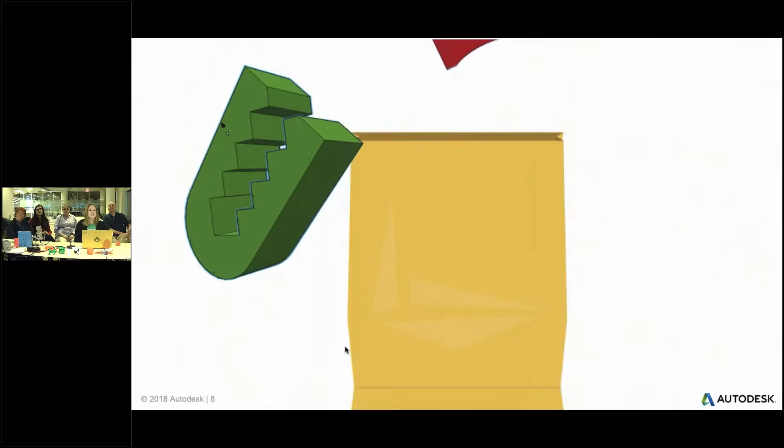All right, moving on. You might be here because you're a teacher interested in the topic of accessibility, or you might just be a geeky teacher like myself, interested in learning something new, and maybe you don't have any background in Tinkercad whatsoever.

So I just wanted to show you this quick clip that I think demonstrates pretty clearly what you can do with Tinkercad. Basically with Tinkercad, if you have an idea in your mind, you can bring it to reality in minutes, just like this.

When you open up Tinkercad, it's a free web-based tool, and a lot of the commands and functions you see happening here are very similar to like if you were to change the size of a picture, for example, in a PowerPoint presentation.

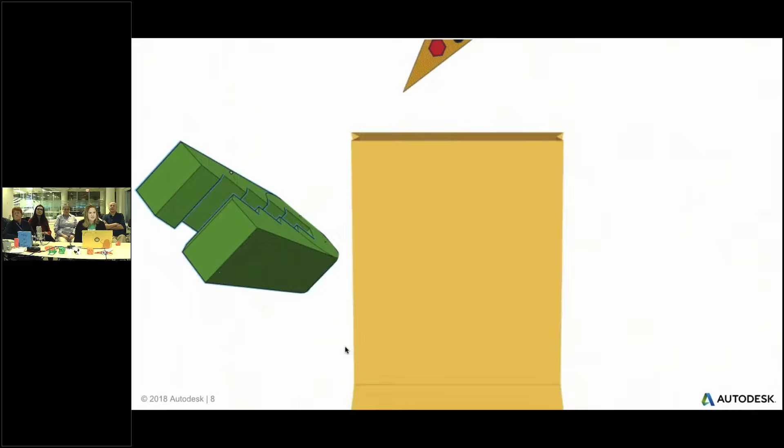It's really that simple. You're just dragging simple shapes onto a work plane and then making them more complex. Taking a cube and then adding a cylinder, and maybe getting super fancy and turning your shapes into holes to subtract from them and make them more intricate.

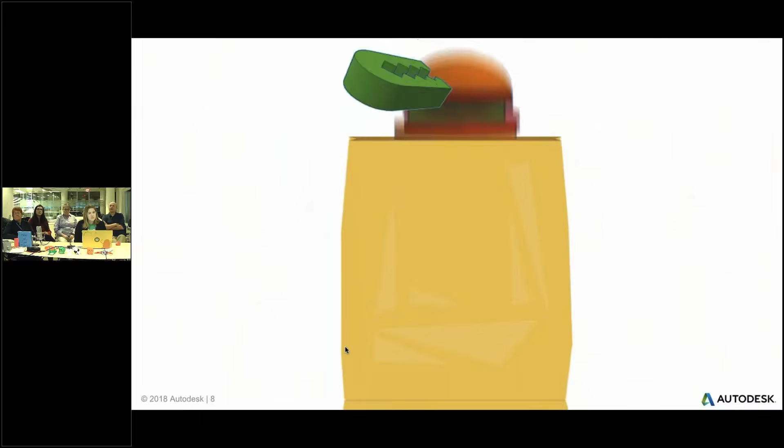And then once you're done, you can export your design as an STL file and send it to the 3D printer to print. So that's how simple Tinkercad is, and you'll see more examples of that later on.

What are we going to learn today? We're going to learn a lot of things today, and I'm really excited about it.

First off, we're going to be talking about the relationship between universal design for learning, universal design, which was actually the precursor to universal design for learning, and assistive technology. We're also going to learn about design thinking and its application to designs by, with, and for students with disabilities.

If you're someone coming from the education community, you're probably very familiar with inhabiting the land of acronyms. We use a lot of acronyms in education because we talk about a lot of complex, wordy things and we like to shorten it down.

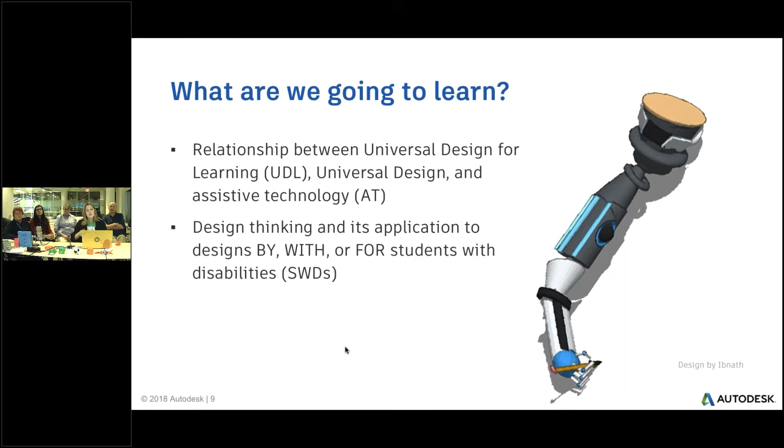But the one thing that I really like about the acronym SWDs is that it really makes you think about how, when you're talking about students with disabilities or people with disabilities or athletes with disabilities, you put the WD last because you speak about the person first. So that's just a nice thing that I've learned through this process.

Another thing that we're going to learn is ways to increase participation of students with disabilities in STEAM activities that are purposeful and promote access and student agency.

One of the really important things that you might learn today, in the spirit of universal design for learning, is that although in some cases we're going to be talking about teaching students with disabilities, when you embed universal design for learning into your teaching, it actually helps everyone. So that's something we also hope that you take away.

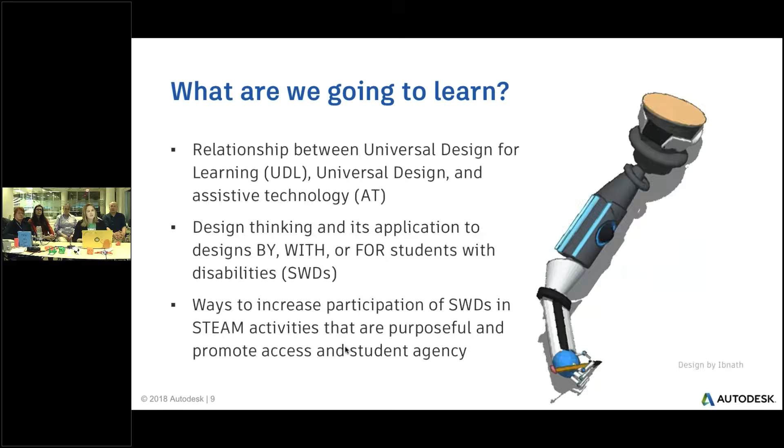In addition, we're going to hear user stories of creating universal design for learning and assistive technology tools using Tinkercad and other 3D design programs.

When I hear the word assistive technology, I think of something futuristic and robotic and very advanced, but an assistive technology could be something like maybe someone in your family has limited mobility in their hands and they're having trouble using an iPhone, and then you just make a simple adaptation to it in order to make the use of that object more easy for that person. So assistive technologies are quite commonplace as well.

Glasses, for example, eyeglasses used to be considered a medical device, and then designers got their hands on them in the 50s and 60s, and they became more of a fashion object.

The keyboards that we use, like typewriters, for example, actually began as assistive technologies, but then the general public realized that they were useful in other contexts as well. So when we design for people with disabilities, we're actually also enhancing our own human capacity.

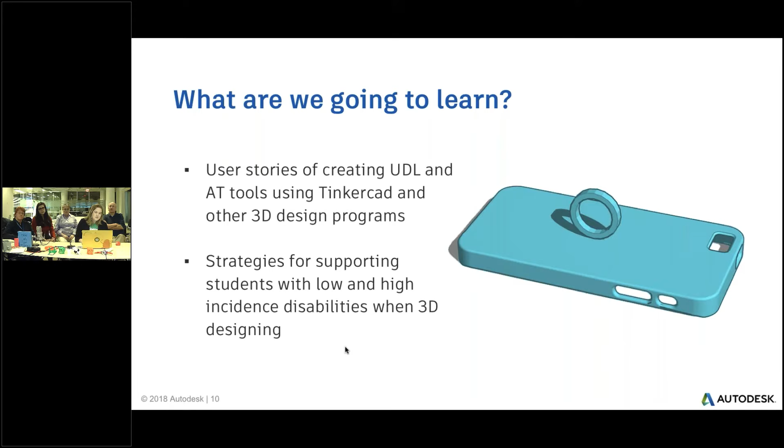We're also going to be thinking about strategies for supporting students with low and high incidence disabilities when 3D designing. That was a lot of words, so we thought that we would break down our agenda today in 3 quick steps. Step 1, we're going to be hearing a call to action and learning about the framework for why and how you would use Tinkercad or other maker activities for students with disabilities.

Or to design by, with, and for students with disabilities. Step 2, we're going to hear some classroom examples. So we're going to go from theory down to examples straight from the classroom, and Rich and Shar are primarily going to be supporting us with that step.

Step 3, we're going to try it out ourselves. So you see in this little GIF that I made for step number 3, this is an example of a hockey sled. I'm going to show you just a few things, a few tricks in Tinkercad that I did to make this, and also we'll learn a little bit about the history of the hockey sled.

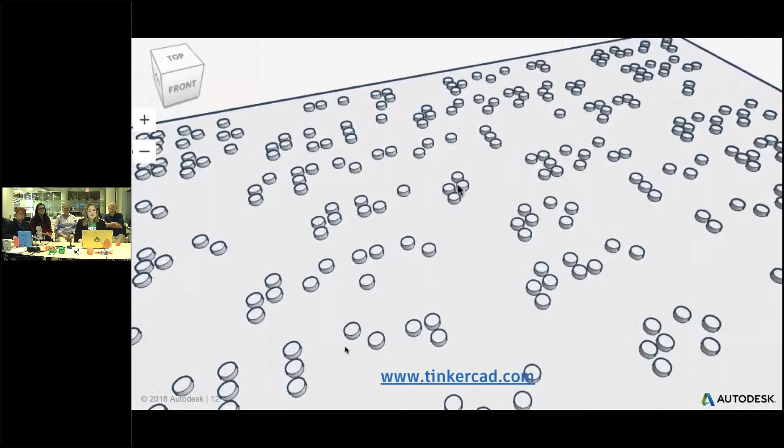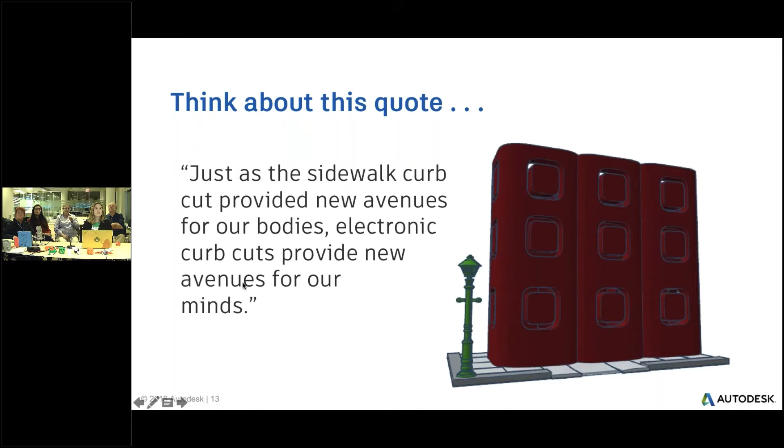Great, thank you, Kelly. Could you control the screen so I can see the chat? What I'm going to do is share this quote: just as the sidewalk curb cut provides new avenues for our bodies, electronic curb cuts provide new avenues for our minds. I'd like you to open up your chat box and tell me who benefits from a sidewalk curb cut. We'll just take a moment and see what you've got.

For example, Mare benefits from a sidewalk curb cut. I benefit from Mare being able to cross the sidewalk to my house. Anybody else with questions? Nope, all right. Well, I don't want to waste any time, so I'll just move on. Chatty group.

People who are pushing strollers benefit from sidewalk curb cuts. Kids on bicycles, skateboarders—yeah, lots of people benefit from sidewalk curb cuts. But an electronic curb cut, any ideas on what we mean by that?

No, I'll spare you. The electronic curb cut is basically using assistive technology, using technology and computers to bypass any barriers that are presented to you in life. Who benefits from that? You can name individuals, but we all benefit from that because then we all get to contribute. So that's my two cents.

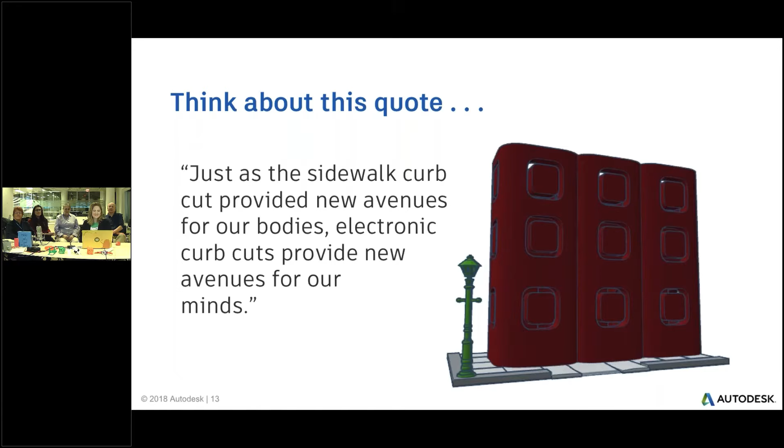All right, so next we're going to get deep into the theory, so call to action and frameworks. So a picture of disability in the US today: 1 billion people globally experience disability. 22% in the US live with a disability. 12% are non-institutionalized people of all ages, based on data from ACS's six questions related to disability. This is higher among women, older people, and racial and ethnic minorities.

So when we think about this data, we want to think about how this impacts students with disabilities. And since we are talking about 3D design, this is heavily tied to STEM and STEAM careers. According to the National Science Foundation, about 25% of undergraduates with disabilities enroll in science and engineering fields, and 20% of those are graduate students.

When we think about people with disabilities, we're not simply talking about visible disabilities, like those who use wheelchairs, those who might be blind, or those who might be deaf or hard of hearing. We're also talking about learning disabilities, diabetes, and other health conditions, some of which may not even be reflected in the survey data that Mare shared earlier.

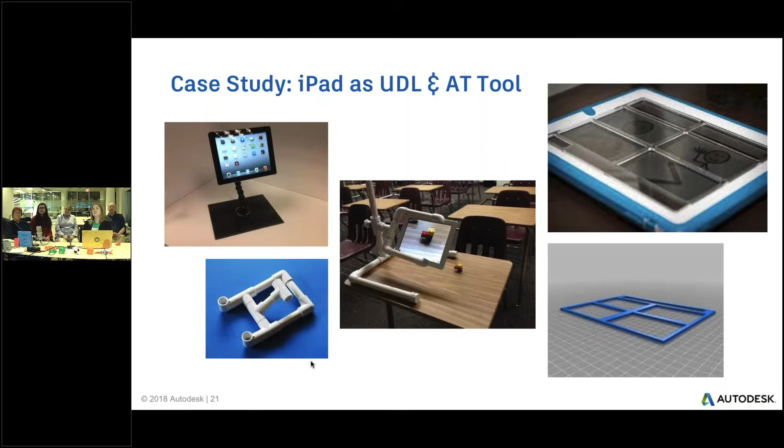So Thingiverse is sort of a key site when you're doing 3D, especially when you're learning it, because there's probably a million things up there. In 2015, a study showed, though, that only 1% or 350 designs on the site were for assistive technology. And of the 70 designers who were represented within those 350 designs, only 13 were people with disabilities designing for themselves.

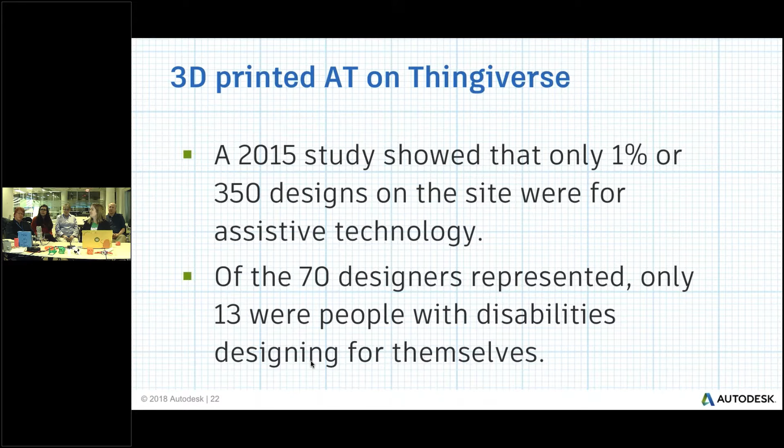The AT adoption rate is low. Nearly a third of AT devices are abandoned because they don't meet the user's needs. And the thought is that it may be because the AT users are not part of the design process.

So at Wheelock, what we've done here is teach teachers, and some of our teachers have disabilities too. But we are teaching our students with disabilities how to design their own products. There's so many times, and I'm a wheelchair user, I often have people saying, hey, let me design something to make your life easier. And what I usually say is, well, what about teaching me to make my life easier? And this is what we attempt to do with our students.

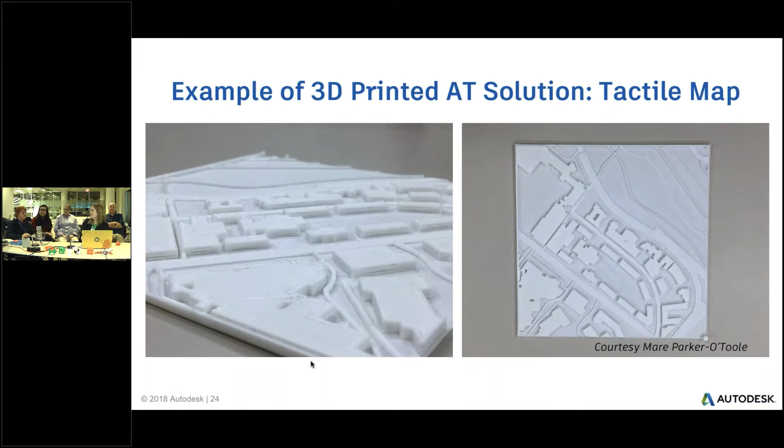This one is actually a map of the campus, a tactile map. It's very easy to do. There's a site you can go to online. You plug in your coordinates or your address to a Google map, and it exports an STL file that you can send to your printer, and you can print on various different scales and heights, so it works to give people a tactile representation of a site, whether it's your campus or your house or whatever. It's really cool. It is neat stuff.

So one of the inspirations for me, and there are many, is the Paralympic athlete and actress Aimee Mullins. And she wears prosthetics, I believe, from her knee down on both legs. And she gave this amazing TED Talk where she's talking about her 12 pairs of legs. One of the things she said, which I thought was amazing, is that someone said to her, it's not fair that you can change your height in significant ways, because she can go from 5'8" to 6'1" tall. And this had nothing to do with heels, this actually had to do with heels mixed with how long her legs were. And she even had custom designed prosthetics for running and for runway walking. So it's really interesting to think about.

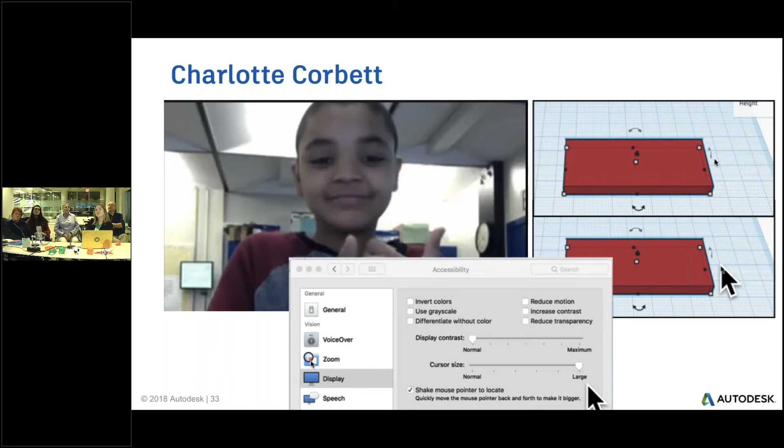So what we did is - can we go to the next slide? I turned on zoom for the display, and that magnified everything, which is great. However, his screen then looked different from everybody else in the class. And this is an example of 'nothing about us without us.'

He didn't want to be different. He had enough challenges in his life with night vision, always freaking out whenever the lights went out, those types of things. He didn't want to be different from his peers. So what I did was I paired him up with a partner, and the 2 of them did this.

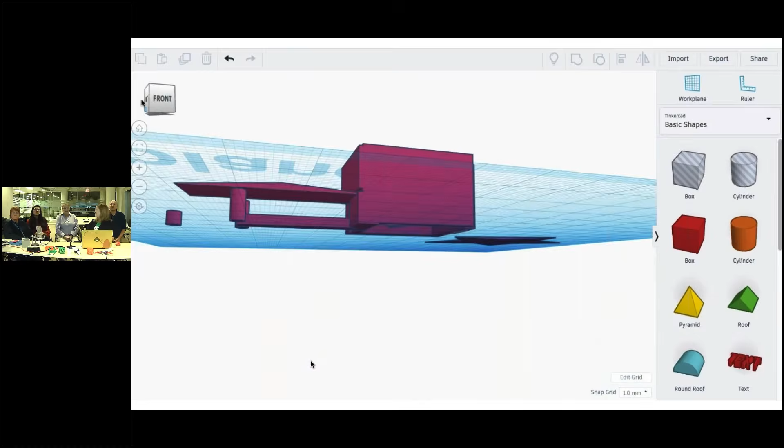Isn't it great? The task was to build a house. The criteria had to be 4 walls, a roof, and a door. And this is the house the 2 of them built.

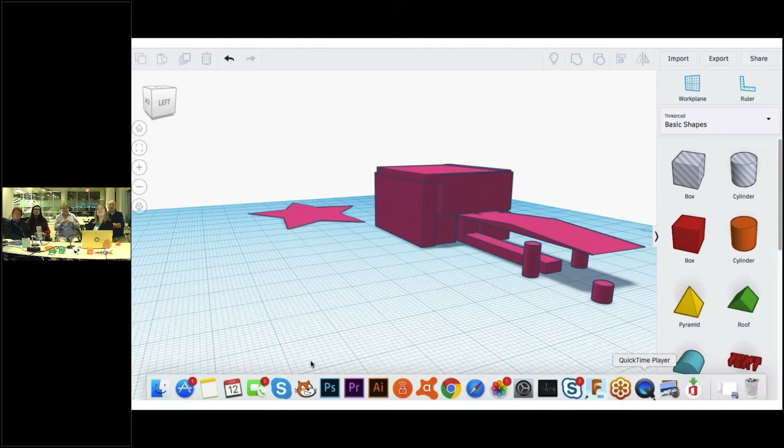You can see it's not perfect. It's authentic work. But considering how much the red blends in with the red, I think it's a work of art. And the boys were very proud of it. It speaks to the power of collaboration and trying all different strategies in order to engage them. And this is great evidence of that.

Yeah, you're right. Wow, I'm smarter than I thought. You're smarter than all of us.

All right, so then let's talk a little bit about design thinking. I do this with my 5th graders now. I give them a cast of characters. I've used The Simpsons, but I didn't know about copyright, so here's 5 royalty-free images: astronaut, child with a backpack, grandpa, baby, person in a wheelchair.

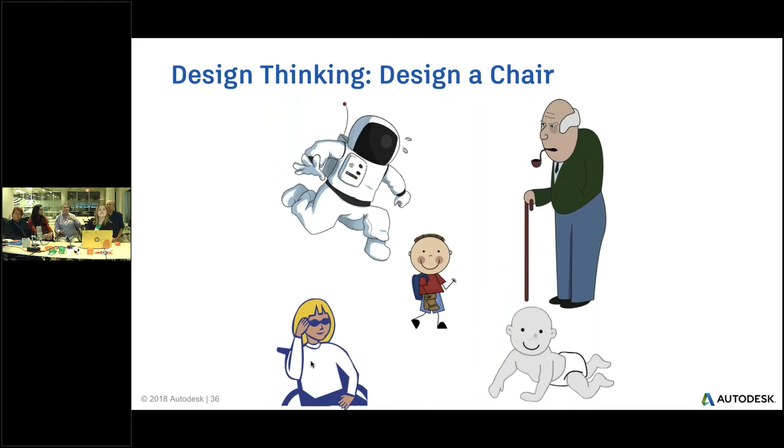They had to design a chair. Now, the needs of each of them are different. As you can foresee, the needs of the baby versus the astronaut are astronomical. Go ahead and flip the page.

Take a look at Grandpa's chair. First, they came up with the blue chair, just using clip art to come up with solutions. Then someone else found a chair with a lift and decided that would be better for Grandpa.

First iteration for the kid with the backpack, Billy, has just a standard chair. But when I talked to them about how heavy the backpack was, someone said, if I had a hook on the back that I could put the backpack on, that would be better.

The astronaut is completely unfeasible. He's not safe, he's not strapped in, he's going to float off into space. But it was a good first attempt.

And as for the wheelchair user, she already had a chair. Helen wanted to trick it out, and so they did. All right, so I think that's my pieces. I'll turn it back over to you, Kellyanne.

I think that's really a great simple way to start teaching about design thinking, either to kids or adults, beginning with the user and building empathy for the user and researching the user's needs, and then building out from there, which could also be applied to using Tinkercad as well as making the chair in 3D. So that's super cool.

Thank you, Shar. All right, next is Rich.

Great, thanks, Kellyanne. So for the past 5 years, I and my colleagues at Brookwood School in Manchester, about an hour north of Boston, we've been exploring the intersection between STEAM, design, assistive technology, empathy, and of course 3D printing. In 2013, I saw a YouTube video that essentially changed my life.

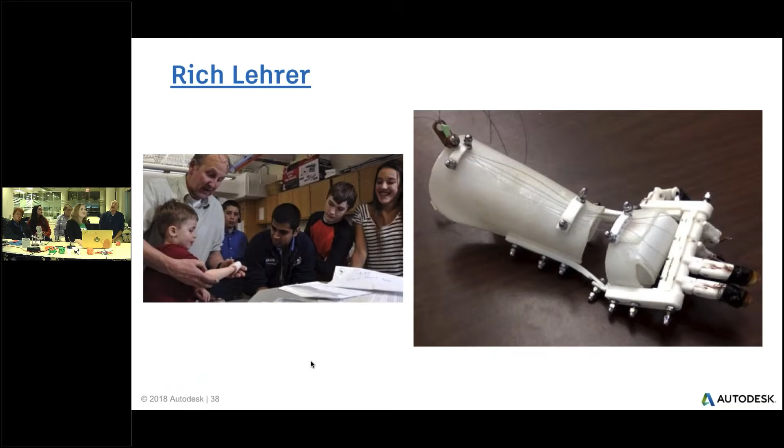We realized that we had stumbled onto something, that here's a technology that not only allows the education process to unfold, but actually allows students to create highly effective, professional final products as well. So that sent us into the world of 3D printed prosthetics.

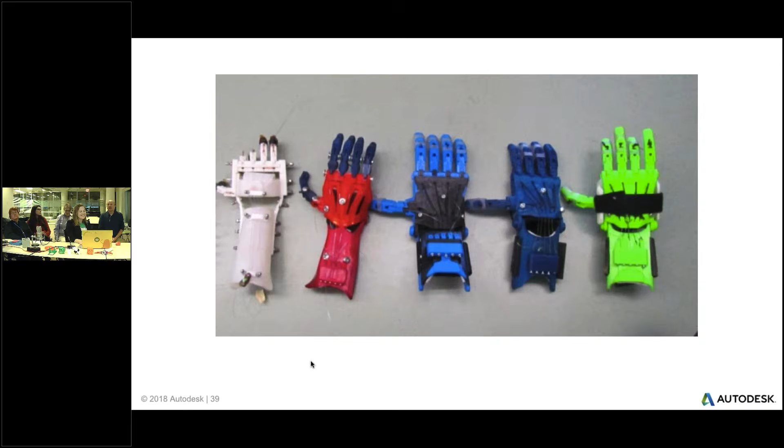Through this work, I became affiliated with a couple of really interesting organizations. eNABLE is an online open source community of over 10,000 designers and physicians and parents and artists, all working to create 3D printed prosthetics and 3D printable prosthetics. I became their education coordinator and worked with hundreds of schools looking to bring this work to their school.

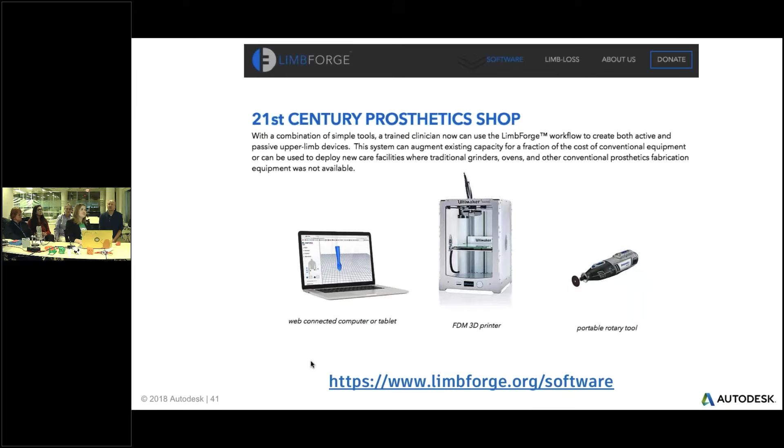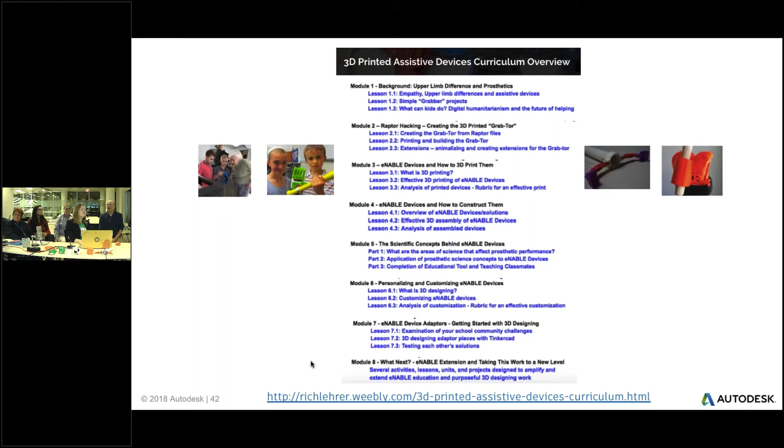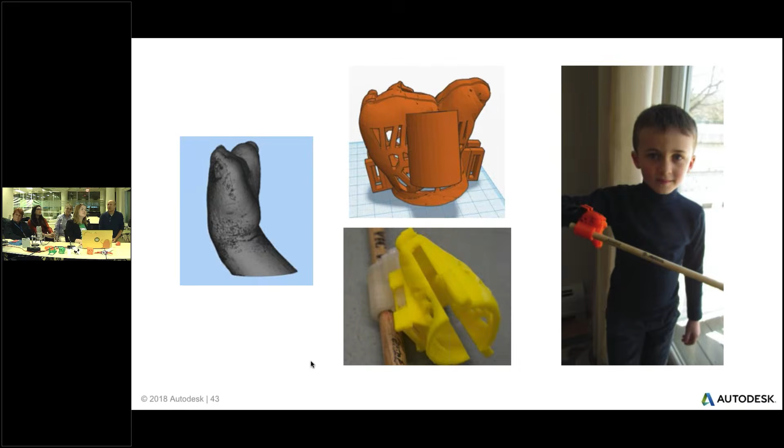And we can then actually import that scan into Tinkercad, and then the students and I can actually work with it. So we have a little video in the next slide. I thought I would include this so you can see the process of how we go from a plaster cast of Max's hand to a 3D printable customized device.

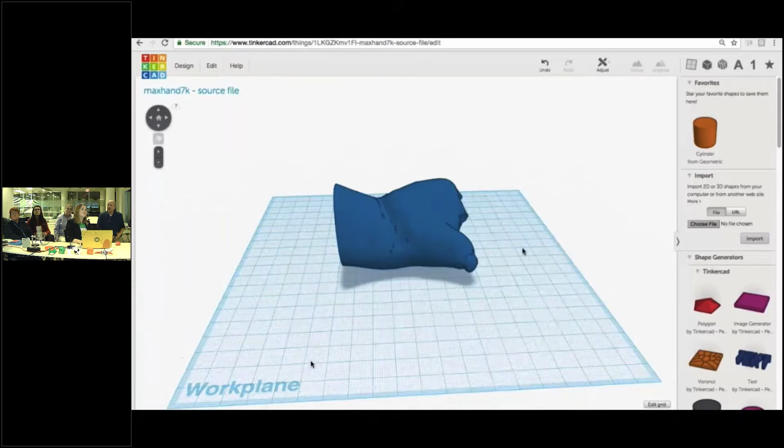So there's the scan of Max's hand, just imported. You can actually import other STL files into Tinkercad and manipulate them. So we just took the actual hand file, and we made a hole in the device the exact shape of Max's hand. You can see on the outside, it's actually his hand shape that we've used to create the device.

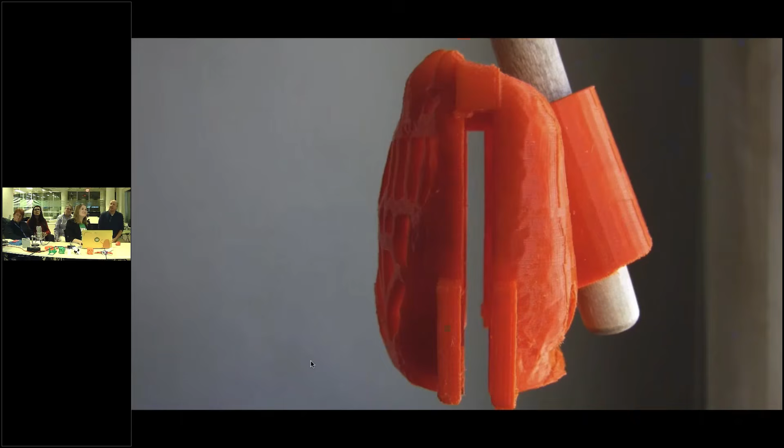Interestingly, we've realized that students can play a really important role here. They can actually start designing the clips. So there you see a little drumstick clip. We have students beginning to design all sorts of clips. We have our kids take a look at our PE department through Max's eyes, and what sorts of activities he would have a tough time participating in. We have them take a look at our music program and ask what sort of problems Max would run into if he was actually trying to participate in our music department.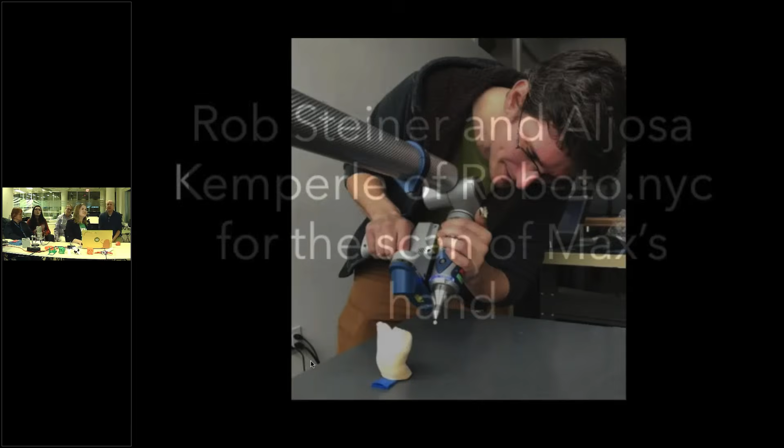This was a really expensive and powerful scanning device that they used there, but in fact now there are really cheap scanning devices. We just have an app called Qlone installed on our iPads, and you can actually do fairly high quality scans using Qlone. So that's also something we've begun to do some work with.

Once we realized that we could actually get our students to start doing some of the designing of the attachment parts of the hand, we realized that we were in some really exciting terrain, that we could actually start having our students do all sorts of authentic design tasks. So about 3 years ago, we created something called the Brookwood Problem Bank. Essentially this started as a Weebly website where anybody in our school could submit a problem in need of a 3D design solution, and then we could turn that over to the students. And we found there were limitless problems in our community that made excellent authentic design challenges for our students.

So for the last 3 years, we've been having students do that kind of authentic design, but we've actually also been helping other schools do that exact work. If you click on the problem bank, you'll see some information on how to create a problem bank, but if any schools want to set that up and crowdsource the problems in your community to students and give them those design opportunities, you can certainly contact me.

Next slide, please. So 2 years ago, we realized that idea was too good just to keep within our school. So we decided we would have our students make partnerships with folks out in our community. We made a collaboration with the Harbor Light Community Partners Association on the North Shore, an affordable housing organization. And our students started to work with seniors.

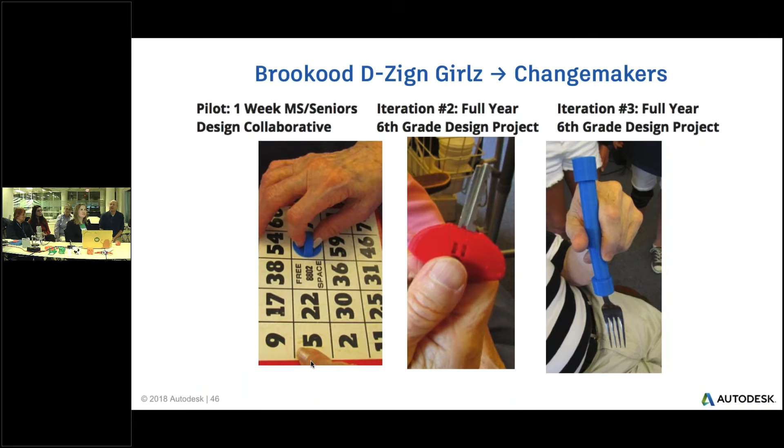And then we actually had our students last week do a full needs assessment of our school. So they walked around the school and they saw where Braille actually occurred and why it was in some places and not other places.

And then they began to ask the questions, well, why is it not in this place? So with Tinkercad and the online Braille translator, which I'll link in the resources, we can have first graders creating actual Braille plates that we can put up on the wall, and have our students play a critical role in helping to make our school more accessible.

So we have absolutely embraced the use of—I often tell people that Tinkercad changed my life. We're using it as a wedge, not necessarily just to make it all about 3D printing, but to show that it's possible for students to find problems in their lives, in their communities, and in their world, and create very sophisticated solutions. Hopefully when they have some experience with what we call change making, they can take those same skills and mindsets and apply them to other areas of their life and solve problems for themselves and others in all facets of their lives.

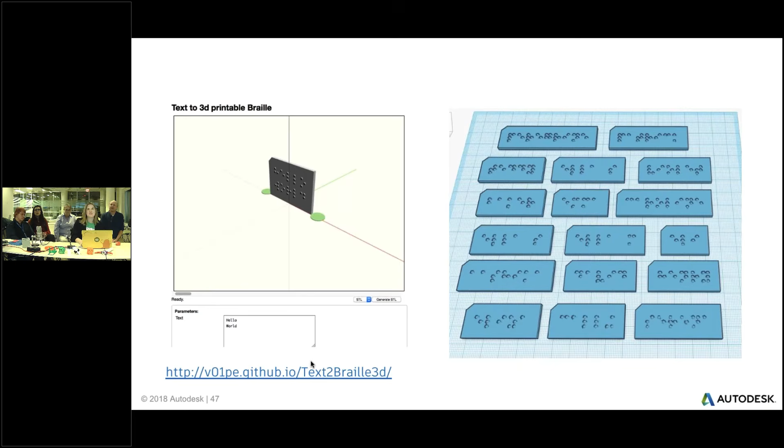So cool. Yeah, I love the way that Rich engages not just his own students, but the community as well, through community-based learning, and how it seems his students are really thinking about how to make the world a better place.

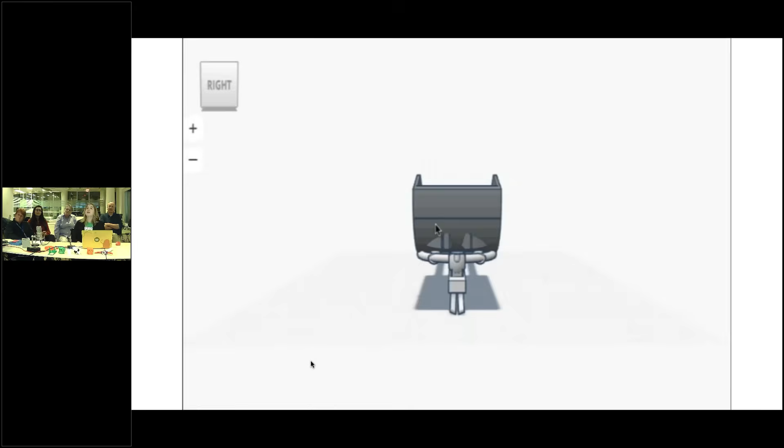I also found sled hockey to be a really good example of this theme of objects that were designed as assistive technologies by people who are actually impacted personally by the disabilities. The hockey sled was actually invented by two athletes with disabilities in Sweden who were in a hospital together. They had enjoyed playing hockey before they were injured, but they wanted to be able to continue to play hockey after the fact, so they didn't let it stop them. In the spirit of the maker movement, they cobbled together some things to build the first hockey sled.

They had two skates that they put on it, somehow soldered to a metal frame. For the sticks, they used bicycle handles. They were able to not let their disabilities limit them from playing the sport that they loved. I just thought that was a cool story, and it's also kind of a cool object to try to create.

So really quickly, in Rich's video he shows you importing an STL into Tinkercad. I wanted to show you how you could begin this process through importing a vector file, so an SVG file. So this is how I begin.

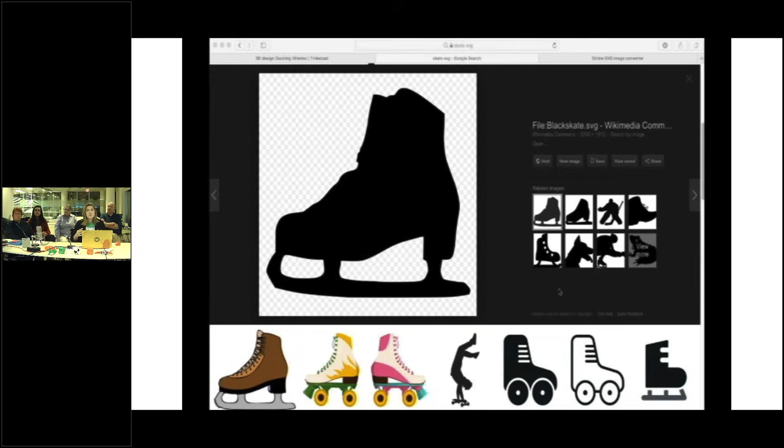When I was making my hockey sled, I used a lot of the Tinkercad shapes to make a lot of the aspects of it, but there are certain things like the skates I just couldn't figure out how to make. So I thought, maybe I can find a nice clean SVG file of an ice skate and work from there. So what you see me doing is I'm in Google Images, and I found an image that I liked.

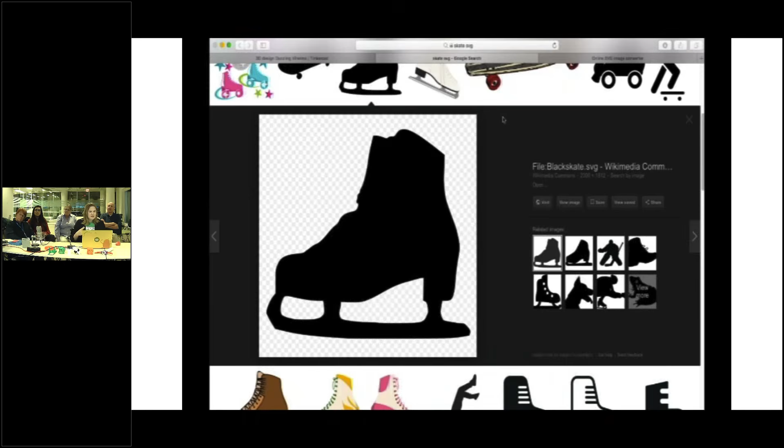Even if it is an SVG, it won't let you download it as an SVG. It's a PNG file, and you can't import PNG files into Tinkercad - they need to be converted into SVGs. So I oftentimes use this site you see here, Online Convert. It's free, you've got to avoid the advertisements, but I find it to be a pretty reliable site for making SVGs. As you can see here, through this process I have created my SVG, and now I'm ready to import it into Tinkercad.

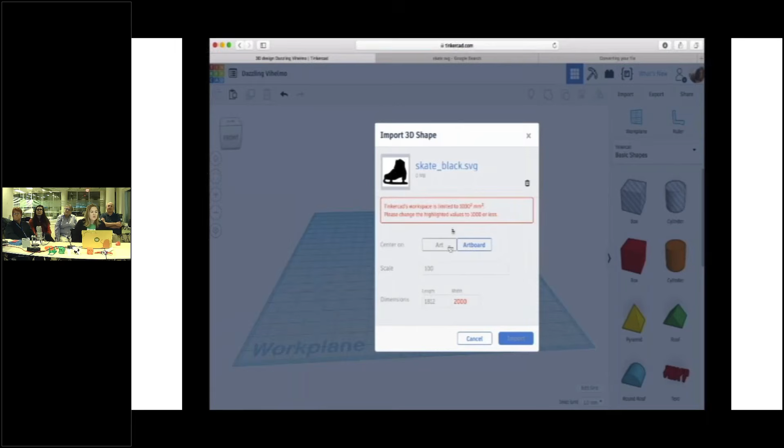So I clicked Import. Make sure you have the SVG file when importing, because if you accidentally do the PNG, it'll reject it. So there's my SVG of my skate. When I go to import things, if it's an SVG, I always scale it down to 10, because otherwise it's super huge. So you just saw me go from 100 to 10, and there we are.

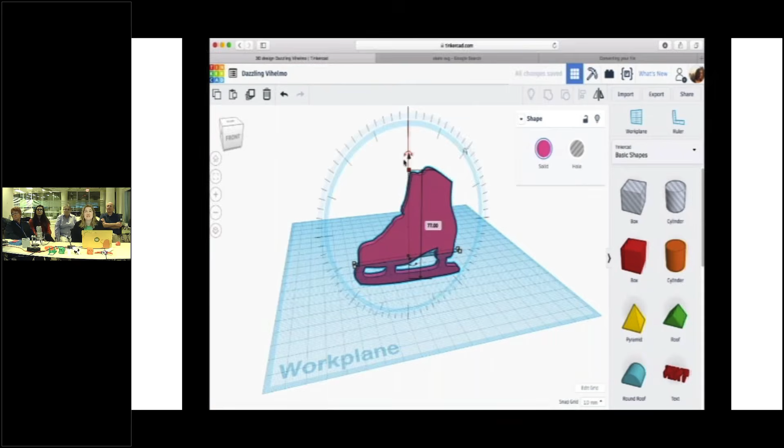So there's the skate, but I don't need the whole skate, just the blade. So you see me here lifting it up using that handle, that little triangle at the top, and I'm hitting Shift as I scale it down so I don't lose my proportions.

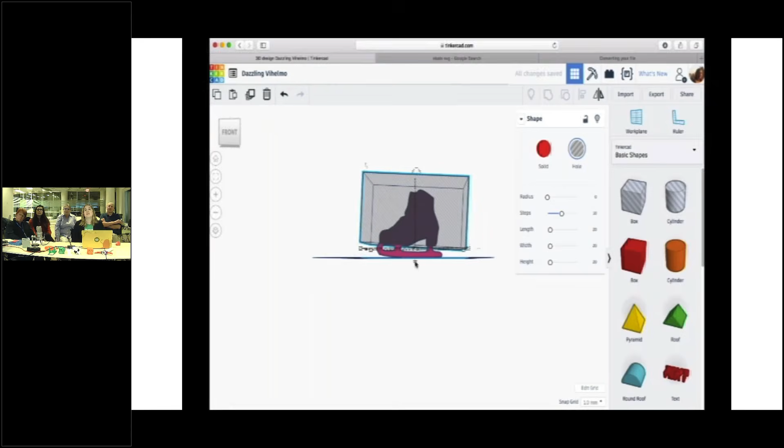Now what you see me doing here is dragging out a block, but it's a hole, and I'm using that to subtract from the shape in order to just use the blade. I'm zooming out so I can see the whole thing, and tilting it a little bit because the skate's kind of at an angle. When I'm ready, I'm going to select the skate and the block using the right button.

And then there you have it - I've grouped them both together. So when you saw me up at the top there hitting that icon, that was the group icon. I selected both shapes, the ice skate and the cube that I used as a hole, and then you have your blade.

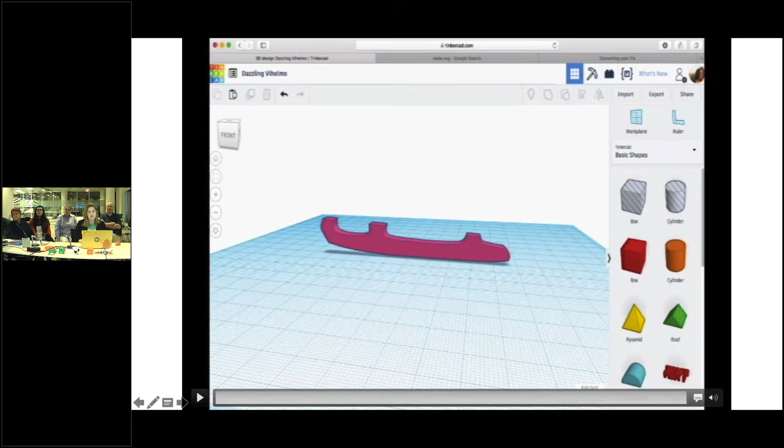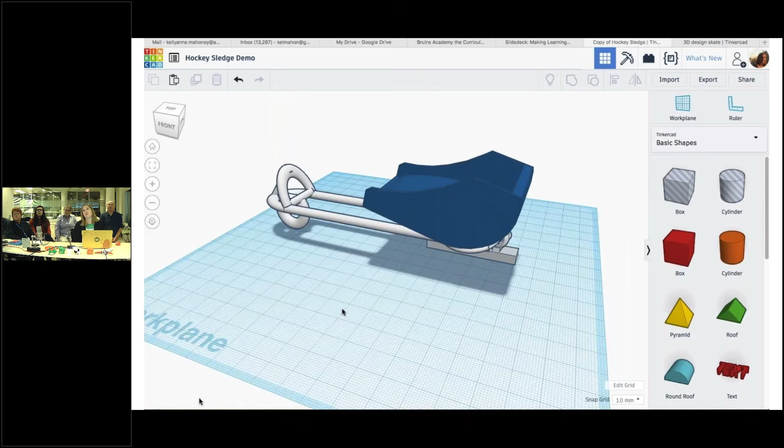In this next step, you're going to see me - here's my hockey sled - actually adding the skate later on, that STL file. But also I'm going to add another SVG, because in designing my hockey sled I was thinking, I've never been in one before, but I'd want my seat to be comfy. So what could I use to include a comfy seat? I thought about a bicycle seat, so I went through the same process as before.

I found a free copyright image so I wasn't stealing someone's design, and that was listed as free to use. So here's my bicycle seat. You can see I scaled it down to 10 again so it doesn't come in super huge, but it's still kind of huge, so I'm pulling it out.

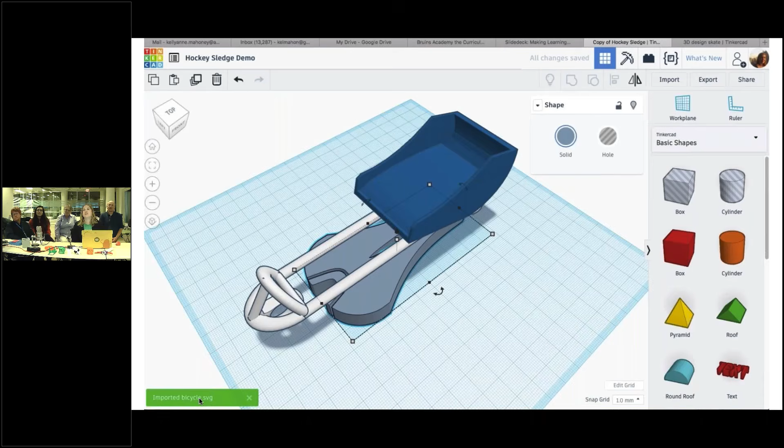I'm just dragging it using the arrow buttons, and I'm looking at it because when you import an SVG, it doesn't come in totally flat, but you can extrude it even further and make it bigger if you want. I'm rotating it here to 180 because that's where I want it to be. You can see how you can teach math about angles and dimensions using Tinkercad.

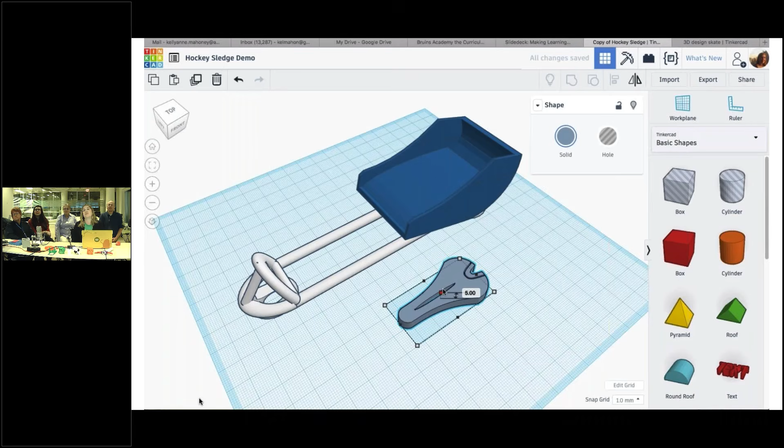I'm lifting it with the arrow, then dragging it over again using the arrows. There's a fancy way of centering things - you could actually align it - but I'm just eyeballing it here. Now I'm going to make it a little bit smaller so it fits, holding down the Shift key as I do it so I don't mess with the dimensions.

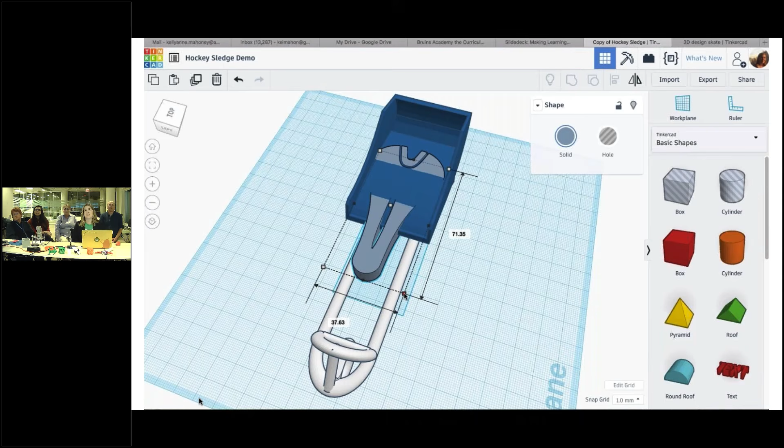Lifting it up here, moving it back with the arrows. I actually thought it looked a little fancy to have it hanging out in the back - it made it look kind of like a sports car. So aesthetically, that was pleasing to me.

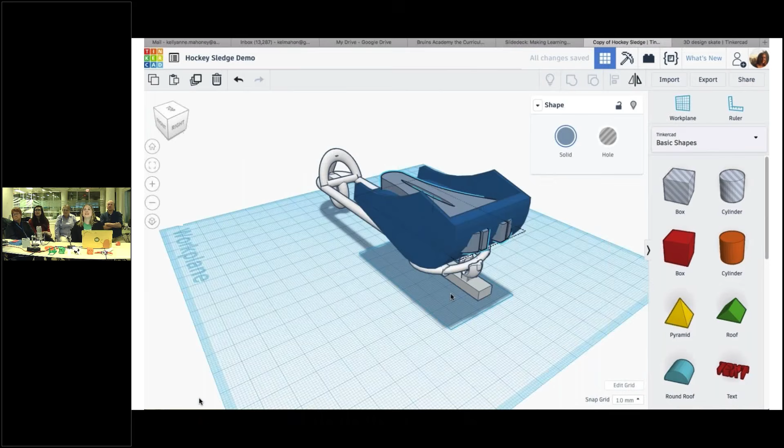For me, that just looks a little bit more comfy. And as I was designing, I was actually kind of in an empathy mode of thinking about if this were the way that I needed to play hockey - I'd want it to look cool, and I'd want it to be comfy.

Then I think I'm dipping it back a little too much, so I changed the rotation on there. Here it's looking pretty good to me right now - I think I dipped it back a little bit.

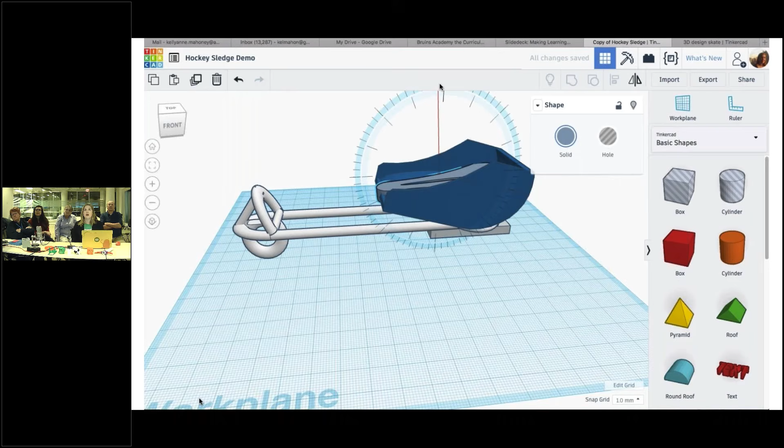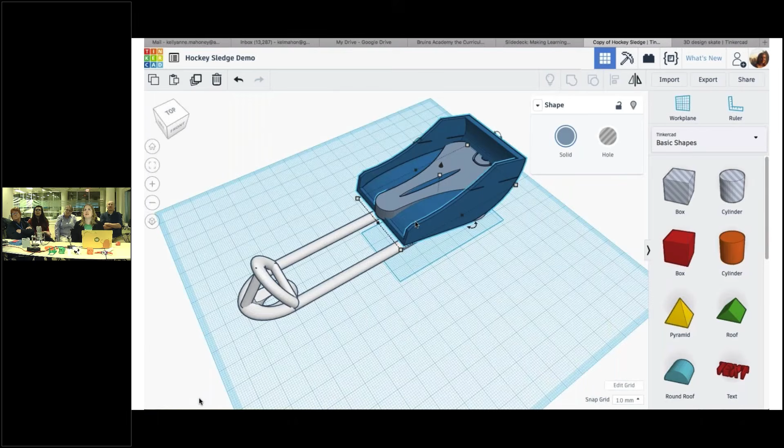What you'll see me do next, once I'm happy with it, is keep that seat selected - you can see that blue outline showing it's selected. Then I'm going to hit the shift key, or hit the right button on your mouse, so I can select both of those things. I'm going to select the sled next, and the reason I'm selecting them both is I want to group them together. You can see them grouping, and now those stay together as the same shape.

The next step is I need the blades, so I'm going back to get that blade from my earlier file. I'm choosing the file and importing it as an STL this time, like the way you saw Rich do it with his son's hand, the scan of his hand.

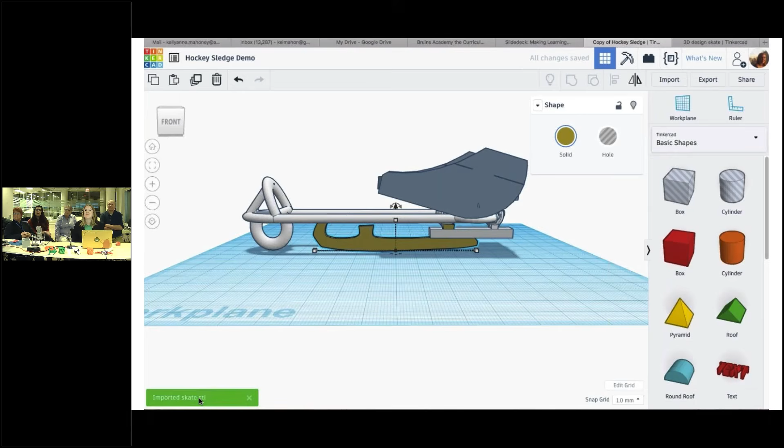So I'm importing the blade, and it's still a little bit big, so I'm dragging it out using the arrows. I'm hitting shift as I make it smaller, then moving it using the arrows. I could move it faster if I changed the snap, but I'm trying to be a little bit precise here.

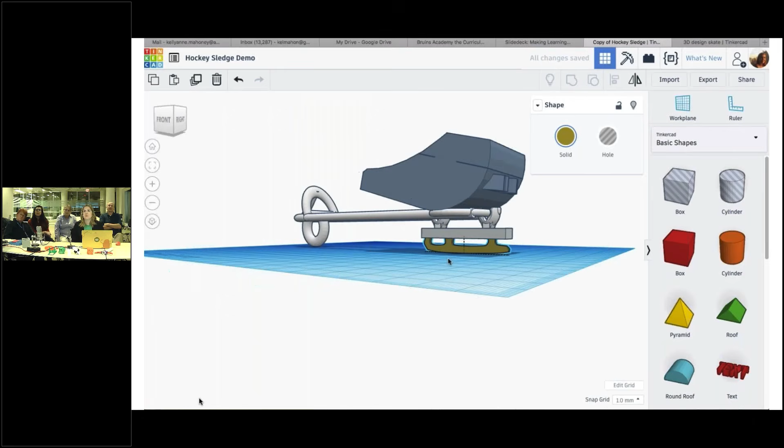You can see I'm almost there, and then I might want to zoom in to inspect it to make sure it actually all connects. This is not the most practical way of actually making a hockey sled, but you can make a little prototype and 3D print it. I'm seeing here that it's not necessarily totally connected, so I'm going to lift it just a little bit using that arrow there.

When I'm happy with it, I realize I actually need two, so I'm going to smart duplicate the blade. To do that, depending on the device you're on, it's either Command D or Control D, and it just pops out a new one that looks exactly the same. If it's at an angle, it'll be at the same angle as well, and it's usually in the same location, which is nice, so I don't have to worry about it being lined up.

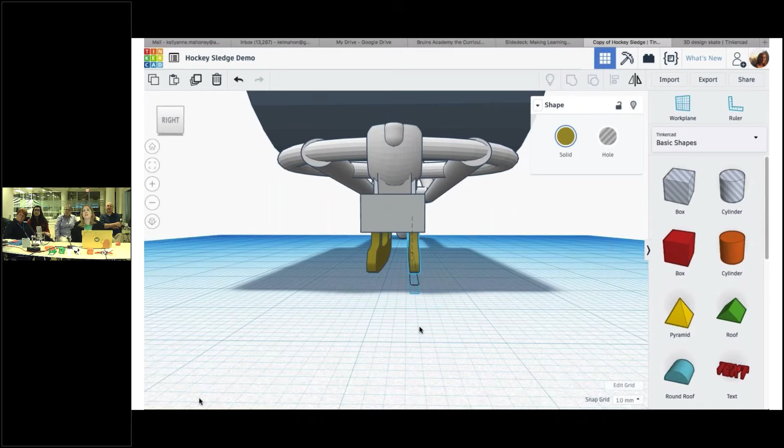It's looking pretty good. So I'm going to select - that one, the right blade, is already selected - and I'm going to next select the left blade. Then I'm going to select that little piece at the top and group it together to make it all one component. Take a look - I think it's annoying me that it's a different color, so then I'm going to group it with the rest of the metal frame.

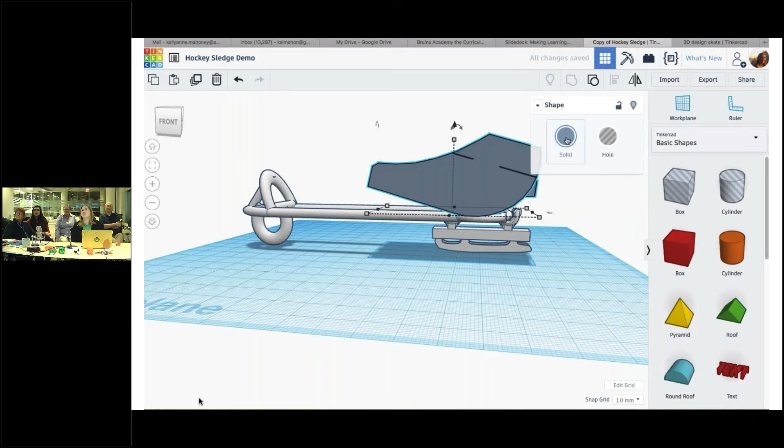I like making things white when they're supposed to be shiny because I think it has a cool aesthetic effect. Oops, I didn't like that color, so I'm going to change it to dark gray. So there you have it. That's an example of how I made some parts of the hockey sledge, and how you can be creative in mixing both your original designs and importing SVGs.

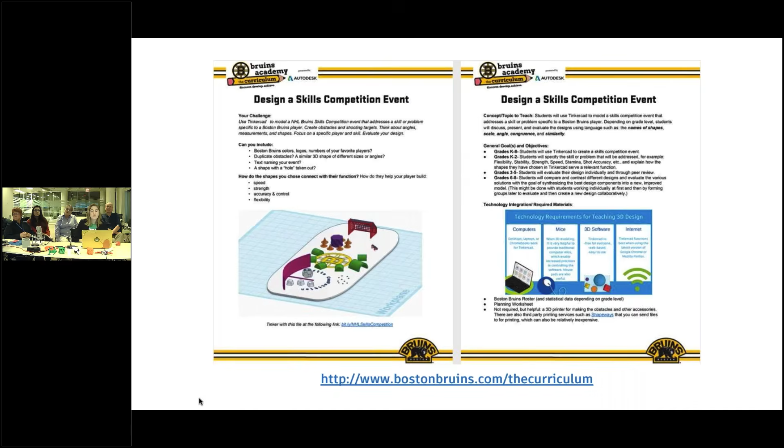In the spirit of accessibility, but also inclusion and diversity, we're super excited about a new project that some members of our Tinkercad team, Erica for example, is doing in collaboration with people from the Black Panther movie coming out this weekend. She's created three really cool movies in collaboration with a group in Roxbury, Massachusetts, making designs like Queen Ramonda's crown. You can make it in Tinkercad. They're meant for teachers, so teachers can share these videos with students and do these projects with them. They've created an Instructable with links, and there are other objects besides the crown - the crown is just the first one. There's also a YouTube series sponsored by Autodesk, so we hope you check that out as well.

It's just, let me see if I can get the screen going for that. So that's actually Rhianon's, the little site that she made, and you'll have access to that. All right, so I'm going into Tinkercad right now.

How am I not already signed in? I'm always on Tinkercad. Luckily, my password is there. So to import, it's pretty simple. It's the same process you would use to import an SVG or any other type of file.

One thing I love teaching students about teaching with technology is that one of the greatest skills you learn is patience, because sometimes technology is not always helpful as we are continuing to sign in. My kids would say, the internet's not working, and I would say, yes, it is, it's just not working here, it's working hard somewhere else. It's also a great opportunity to teach the word ephemeral, the vocabulary word. You don't appreciate it until it's not there.

For some reason, I'm not signing in. Oh, maybe it didn't like my password. Now it's signing in, that was my fault, it wasn't the internet's fault. I'm sorry, internet. You always have to apologize for the internet. She's very apologetic to the temperamental webpage. Right, you never know.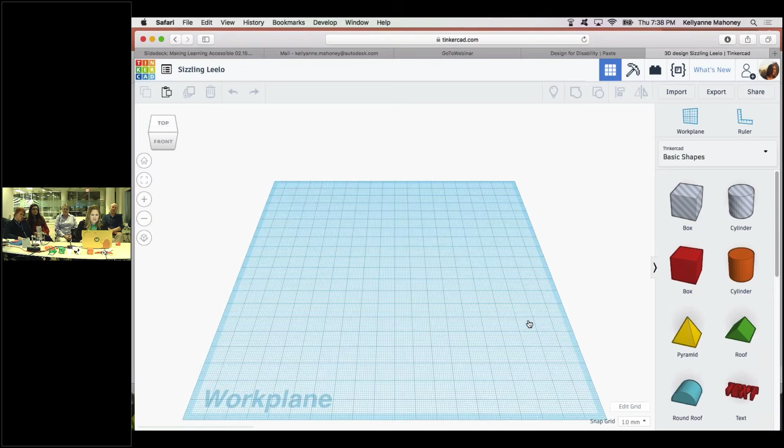All right, so to import an STL, I'm just opening up a new design. I do import, choose a file, and search STL. So you choose STL, my skate's coming up there, and then I just hit choose. I'm not going to scale it down for this one. Import, and there it is. So that's how you import.

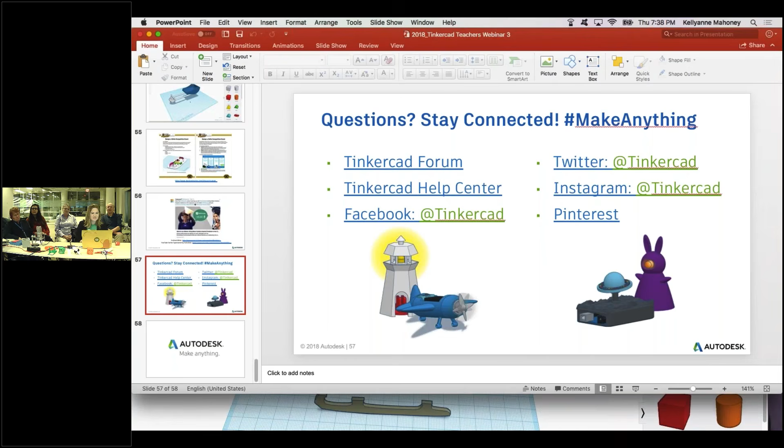Other questions? Did that answer the question? Yes, that does answer the question. We had a nice comment here that someone is a Project Lead the Way teacher, and the new design and modeling curriculum for middle school focuses a lot on designing orthotics for students with disabilities, so just commenting if anyone else is Project Lead the Way.

It's a good connection right now, and a lot of people are thanking everyone. Rich, go ahead. I'm certainly very familiar with Project Lead the Way. We work with a lot of schools that have implemented successful curricula through it. I know they've started to do a lot more design and 3D printing, and I think the work we're talking about provides that extra purpose for the work students are doing.